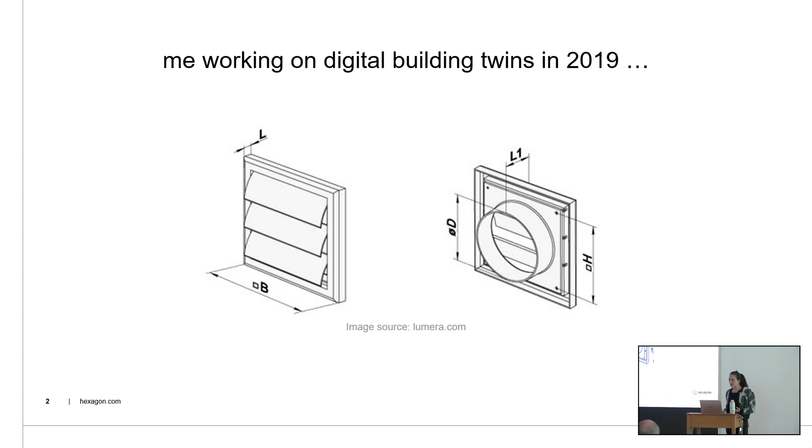So luckily in this case we found it, but I was wondering how can such things be prevented? And I think at that moment, if we had had an asset scan, which would allow us to also see what is actually in the real world, a lot of things would have potentially been different.

So scans existed at that moment. Large-scale terrestrial laser scanners were common. We had scans as well. However, those scans were relatively, let's say, dumb XYZ raw point measurements, and they were relatively large and cumbersome to work with, since they were hosted on desktop computers.

So in order to detect such faults in the installation of systems, we would have had to overlay the 3D model with reality and visually go through the different stories to check what is not correct. And that led to the fact that often those point clouds, if one had to clean up storage space, were deleted again.

I think it was at that moment that I probably signed some pact with the reality capture gods, because after that I never lost my fascination for this topic of reality capture, and point clouds have never left me. So I signed up for a master thesis and then 5 years of PhD studies to actually go into depth of what reality capture is, what point clouds are, what images are, and what AI methods we can use to enrich them and close the gap between the digital and the physical.

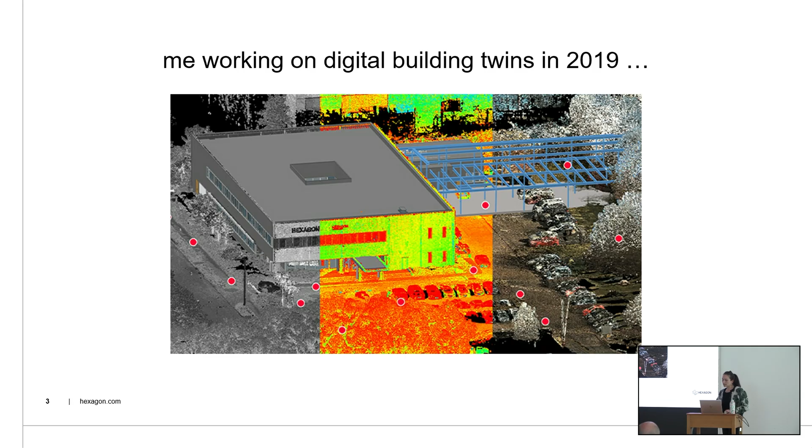And now I am in a company that has this reality capture at its core. Hexagon is the world leader in precision measurement, LiDAR technology, so all of this might ring a bell. And reality capture has come to a whole different level of maturity.

So the size of those point clouds has not become smaller. No, it has probably even become larger. However, we have become smarter to deal with those kinds of data sources.

So if you can imagine such a plant setting, this is not a few tens of meters, but those might range into 200, 300 meters on either side. So those are extremely large scenes, points we don't even want to count, and extremely intricate structures that are intertwined and sometimes even hard for a human to grasp. So at Hexagon there is a cloud and software portfolio capable of dealing with these kinds of sources.

Just to give you an example, with the cloud setting, those point clouds can be streamed onto desktop applications, into BIM authoring tools or other applications, where the data doesn't have to be hosted anymore on the device, but just parts, subsets, filtered parts of the point cloud can be directly worked with in engineering tools.

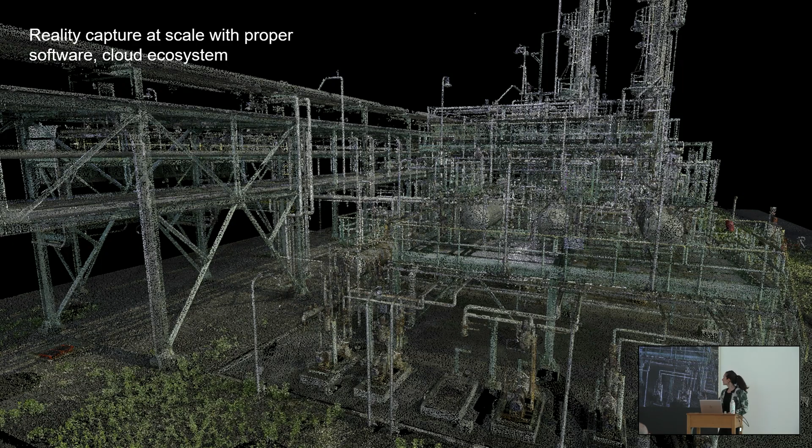So what is still missing is, as we were talking before, somehow an intelligence to this point cloud, right? So XYZ raw measurements, this problem we have not solved. However, here is an example of what we can do with analytics - AI solutions which can analyze the points or the images taken in the same scan and attach a certain meaningfulness to points, gathering them into objects, for example, or semantic classes.

And in this case, we can start managing this scene. So objects can start to be coupled with IoT systems, for example, or we can think about how to navigate to those objects for repair missions. Objects can be counted, they can be filtered out, or they can even be moved around, maybe cropped and moved around, tested in alternative scenarios, etc.

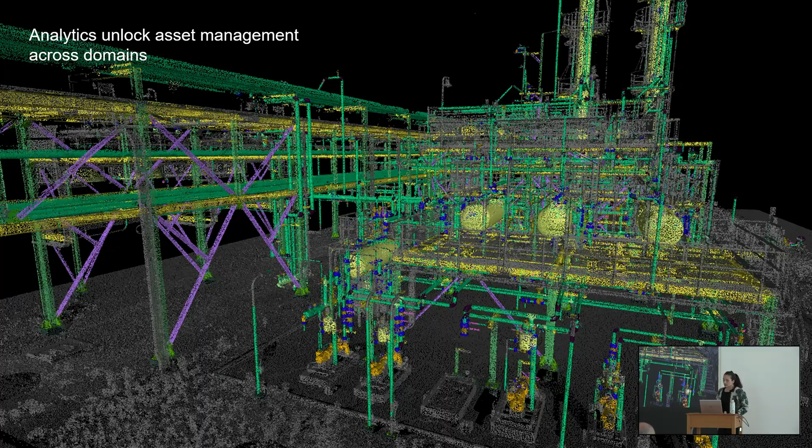So how did we get to this kind of analytics? For this, I want to bring you through a brief history of how we taught machines to see over the last decade. Everything kind of started off around 2015 when the first convolutional neural networks came out and the first data sets came out which allowed machines to train on this task.

Semantic segmentation was where I want to start. With images, you can see objects were starting to be identified, masks were laid on top of images. And in point clouds this happened a few years later with PointNet, where the hypothesis was generalized into the 3D space. Here you can see objects can be ordered into different semantic classes. However, we cannot yet tell objects apart to say this is chair number 1 or chair number 2.

So what followed afterwards is instance segmentation, telling objects apart within one semantic class. You can see again that first the advancements were done in 2D, and then shortly after there was also instance segmentation on 3D point clouds. This allows us now to really distinguish objects one from another.

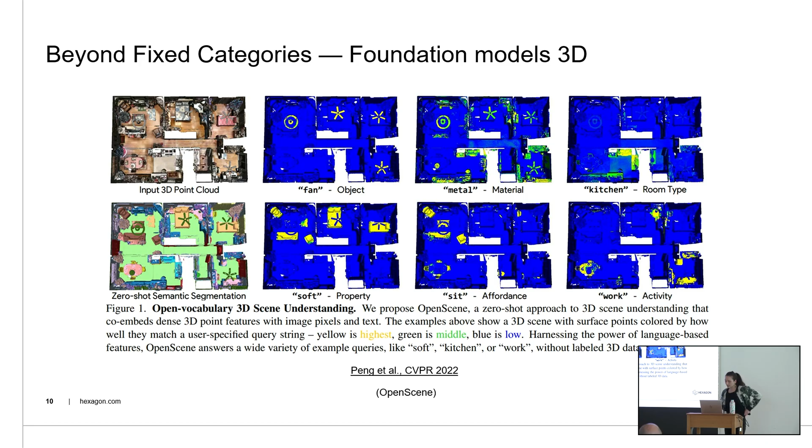In most recent times I've come across this article from 2026, which claims to align not only image and text space, but one more domain, the CAD space, computer-aided design. This is an area that probably rings a lot of bells in your head, because it's the format, or one of the formats, that engineers work with. What was before perception and visual becomes now maybe in reach with engineering formats.

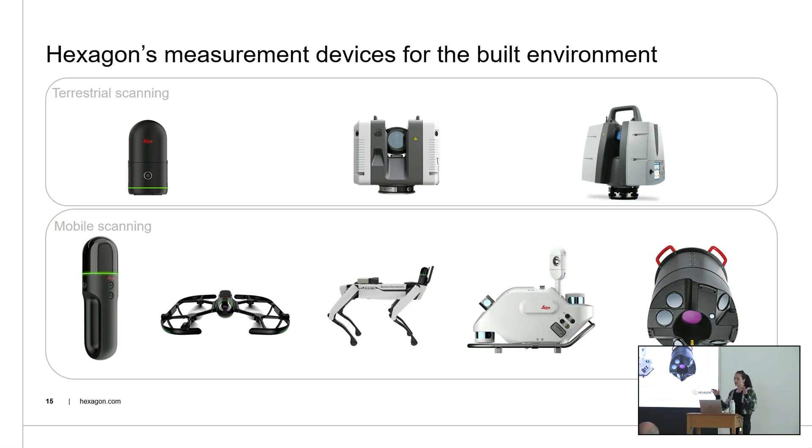So this turns into point clouds like this. You've seen it before in some other of my pictures. And the basis of our outcomes is, of course, this big competency of performing analytics on point clouds. We're here talking about big scale, really large numbers of points, but providing a lot of value to our engineering workflows.

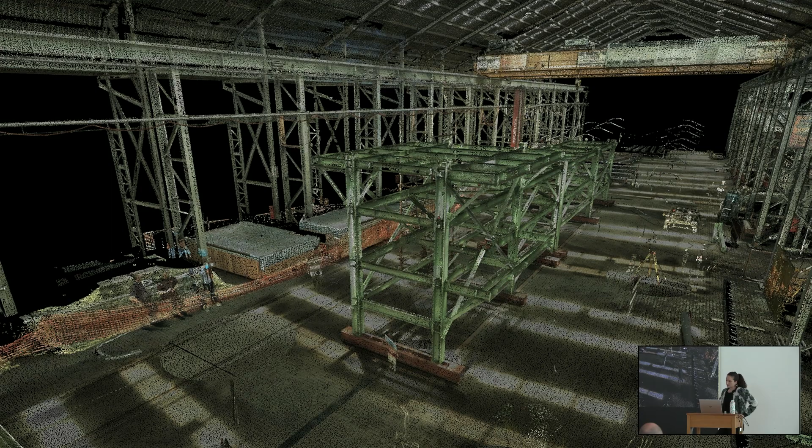The way it looks is that we can attach meaningfulness either on a semantic level or an instance level to those objects. Here you can see how the steel structure is segmented into different types of steel beams, and potentially here you could imagine how these other classes could be filtered out, and the focus could be laid either on the whole structure or just on a simple structure.

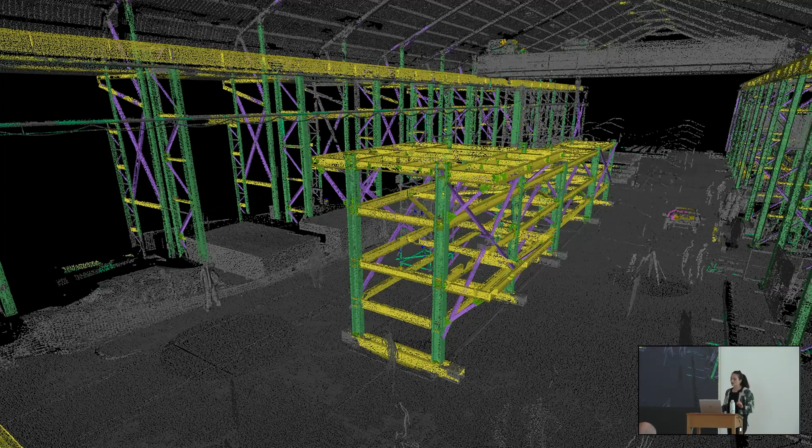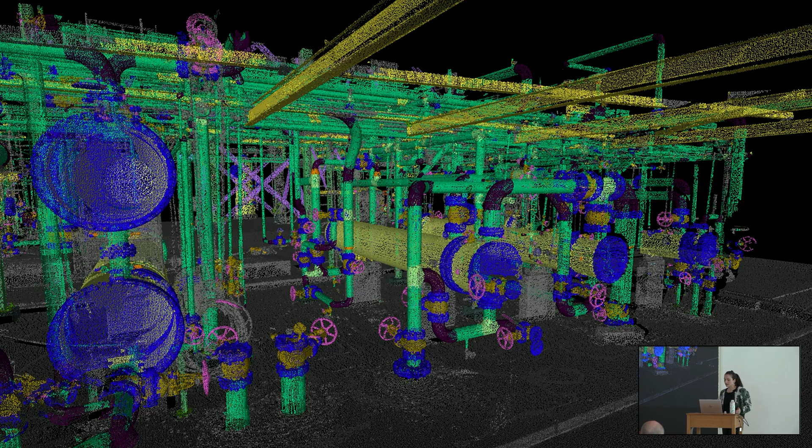It becomes maybe more visible when I show you an example like this, an object that reminds a little bit in its intricacies and scale to the ventilation flap I mentioned at the beginning of my presentation. So the ability to really identify small and fine detail objects at the same time as very large objects such as steel beams or extremely large tanks is definitely a challenge, but well tackled within Hexagon.

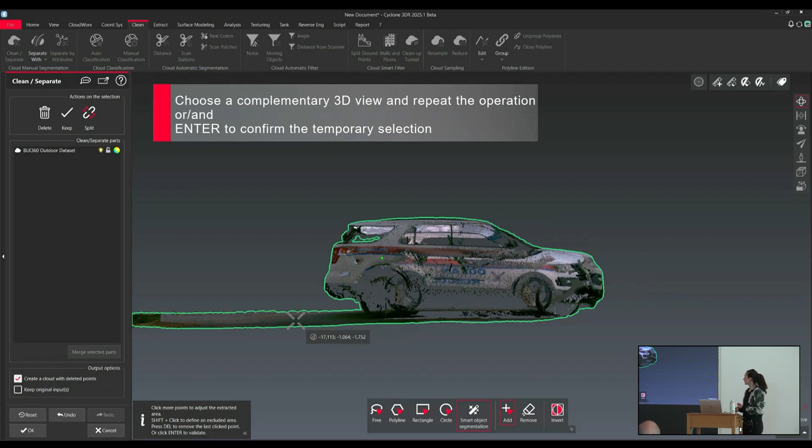There are also some solutions that involve more user involvement. For example, in point cloud cleaning and preparation, here you can see how a foundation model is used to support this workflow in manual point cloud segmentation.

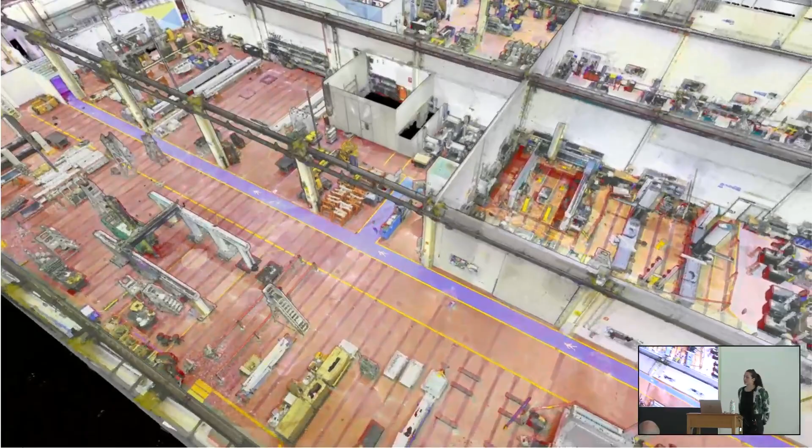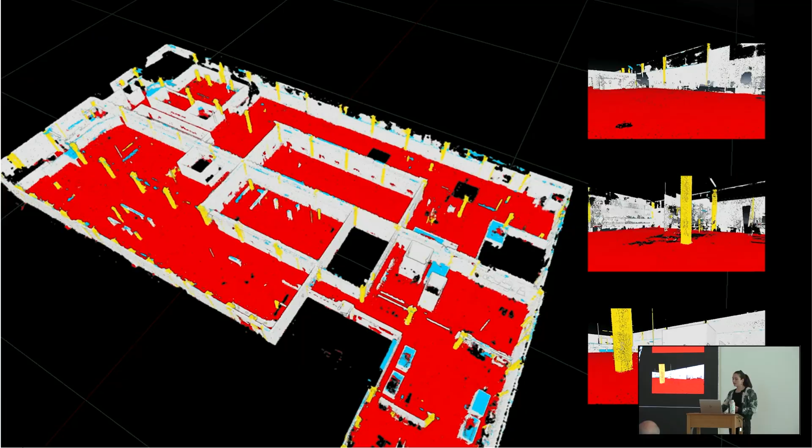Going forward to sites, here you can see how in a factory setting, which is actually one domain where there are frequent revamps, frequent retrofits, the indoor arrangement of objects correlates with the production line or with the produced product. So with different product cycles, the indoors have to be revamped frequently. Here you can see how a lot of the indoor clutter has been removed, and we're simply left with the structural parts of the building.

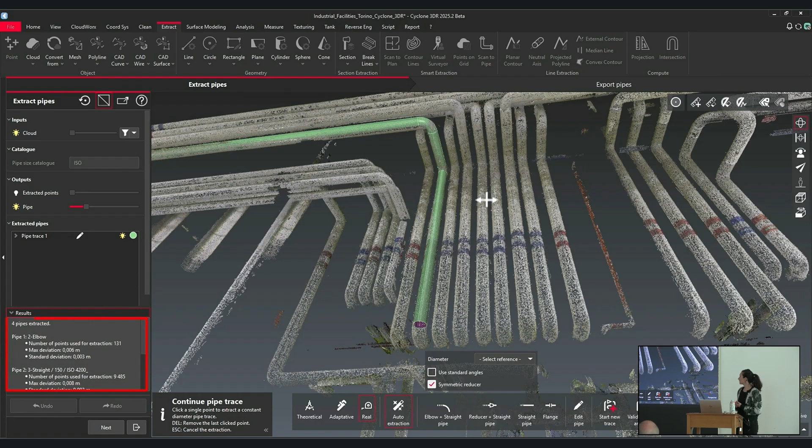Those can be used like in a scan-to-BIM workflow, like is depicted here. Again, you can filter out all the object classes that are not of importance to you, and you can start performing scan-to-BIM in a semi-automated fashion, where the modeling is informed by the object's geometry and semantics and can be traced relatively quickly rather than a non-analytics based workflow.

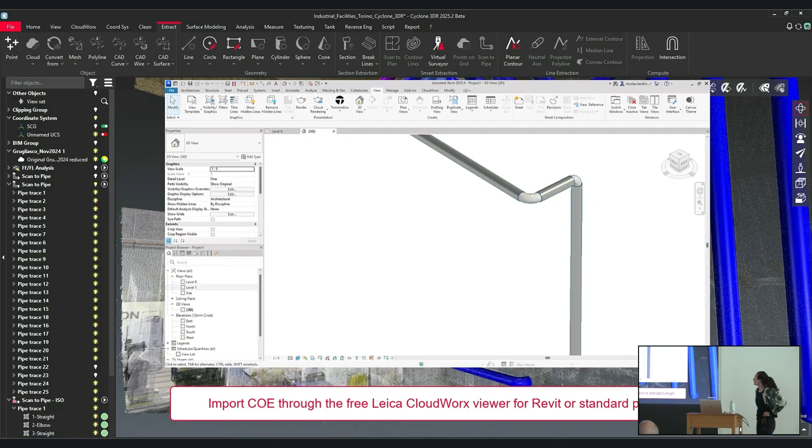Here you can just see how these pipes, in the end, can be exported and then fed into a BIM modeling tool such as Revit, by Autodesk, as fully modifiable Revit families.

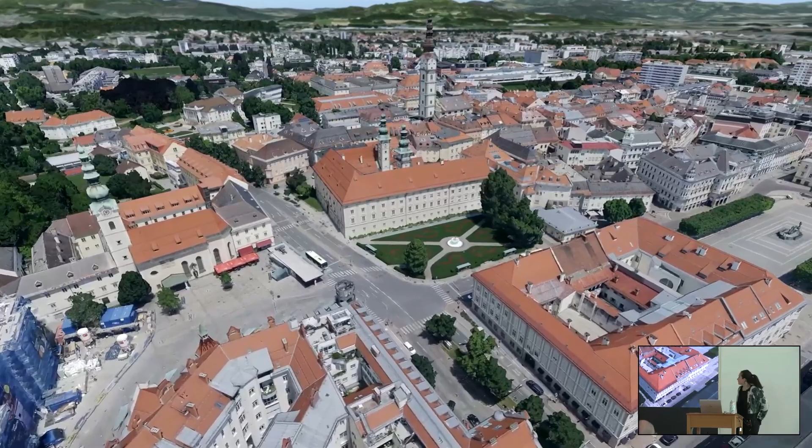Okay, so I go on to the next example on the city scale. There is the city Klagenfurt in Austria, which has committed to the EU mission of becoming climate neutral and smart cities. The goal here is to have, by 2030, 100 cities that have adopted certain green standards to be inspirational roles for other cities to roll out by 2050.

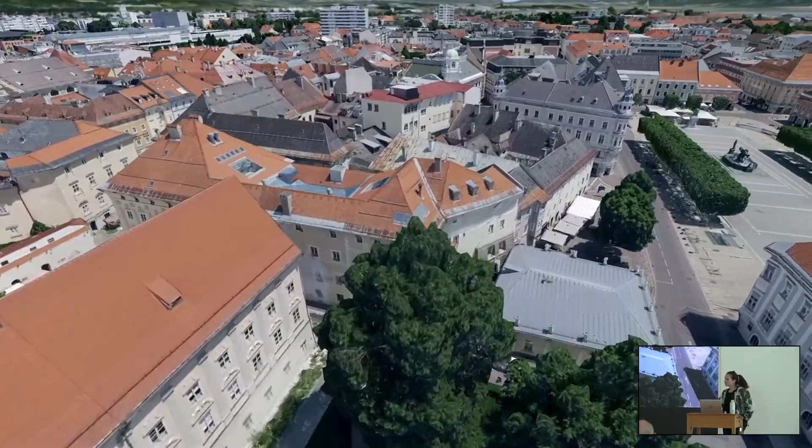Klagenfurt has committed to scanning their city every, I think, 24 months. They can do potential assessments, but also monitor the progress that has come with adopting new technologies, such as, for example, solar potential. So here with analytics, the total area of roofs can easily be calculated.

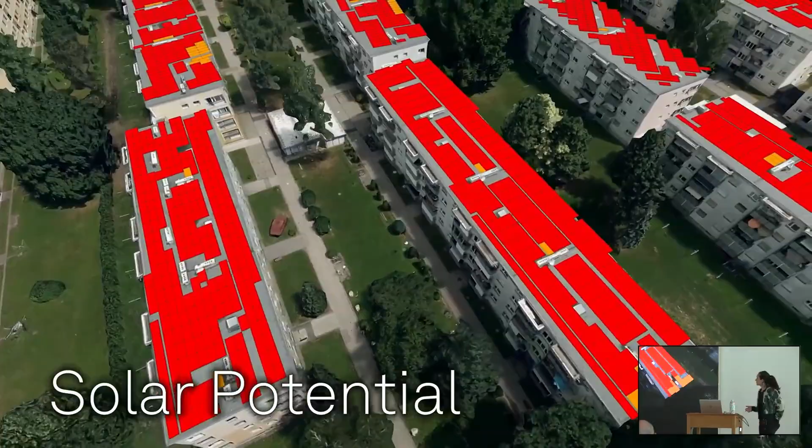Simulations can be done, and in the end, the progress can be monitored, and direct data-driven takeaways can be made on the city's progress. In this case of solar adoption, for example, it can be proven with data that there was a 33% faster adoption rate of solar panels and solar energy provisioning compared to other Austrian cities.

Maybe you might ask why we need such a high-resolution scan for calculating solar potential. There were also other experiments done, such as wind tunnel experiments, where the detailed geometries were actually important and yielded some surprising outputs, which, especially in intricate historical downtown settings, were not necessarily the ones that we would have expected with a local experiment.

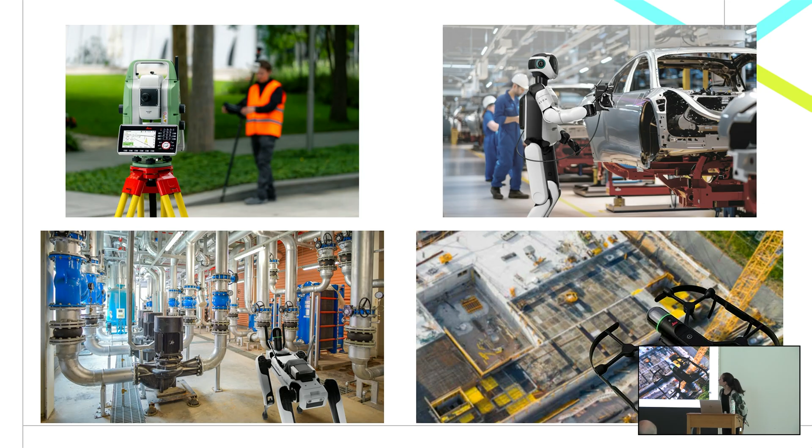Then another part that's important for Hexagon is AI on the edge for the built environment. So here I give you a few examples. I want you to focus on the picture I will talk about, and so we will start at the top left. This is a total station. It's an electronic, high-precision electronic survey instrument.

It's used, for example, on construction sites to determine very precise points on where construction should start or where it should extend to. In infrastructure projects, this becomes also very important, where it's critical to have proper alignment. Also in sports, for example, this is used in the Olympics to measure exact distances.

The critical part is that the prism is properly set up, because if the wrong setup is chosen in the total station, the whole measurements are off. And you only realize it in the office, so you have to go and do the scan again.

This total station now has the capability to detect on the device which prism is in its reach, and it chooses the right setting and function for it. It can also track the prism, so in case you pass behind a tree and lose sight of it, it follows directly.

Then there's the ARC module, which some of you might know from collaboration with Boston Dynamics - I'm talking about the two images on the bottom. The BLK ARC module was a scanning module designed to be integrated with robotic carrier solutions. The goal was to really bring laser scanning onto mobile platforms, into environments where humans either don't want to go or cannot go.